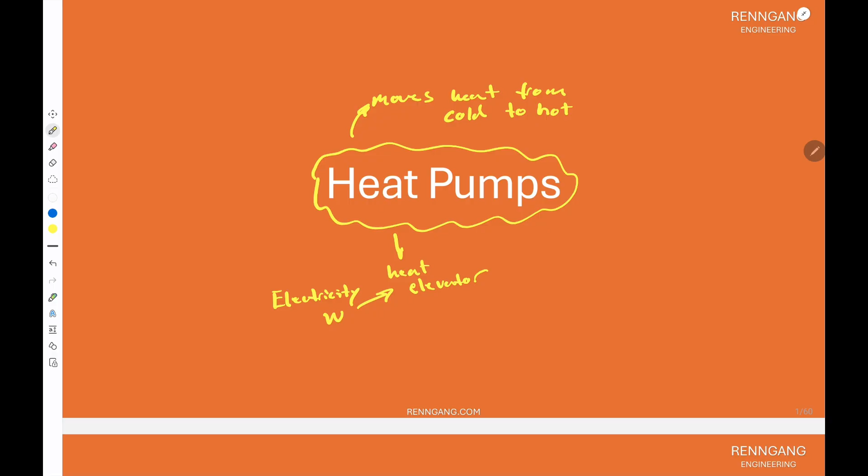So everyday examples of systems like this is that you use a heat pump to heat from cold outdoor air, or the ground, or the water, and deliver that into your house in the winters. So yes, even cold air contains heat, and that idea is crucial and often misunderstood as well.

So the reason that we are covering this is that it's an essential part of thermodynamics, and it's one of the most energy efficient heating technologies. It's used everywhere in modern engineering. On the outside of our office at Renngang, we have a heat pump heating our office space.

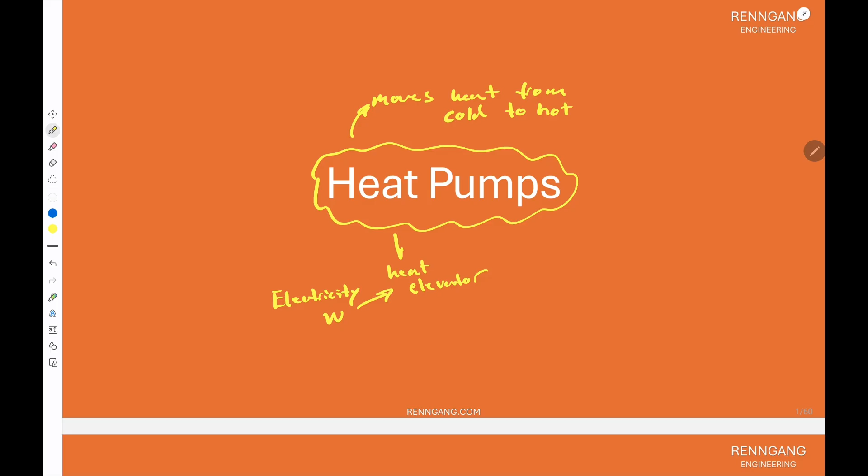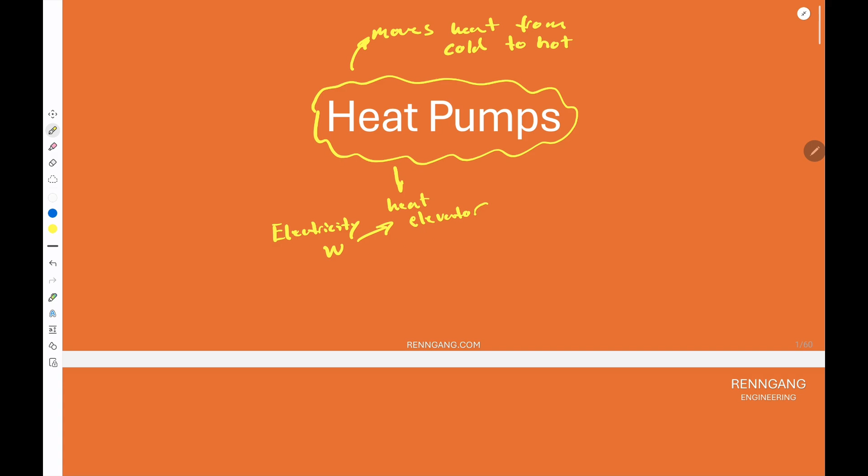Let's continue with a basic understanding of heat pumps. When we talk about heat pumps, we talk about usually a vapor compression cycle. So we are going to talk about a vapor compression cycle.

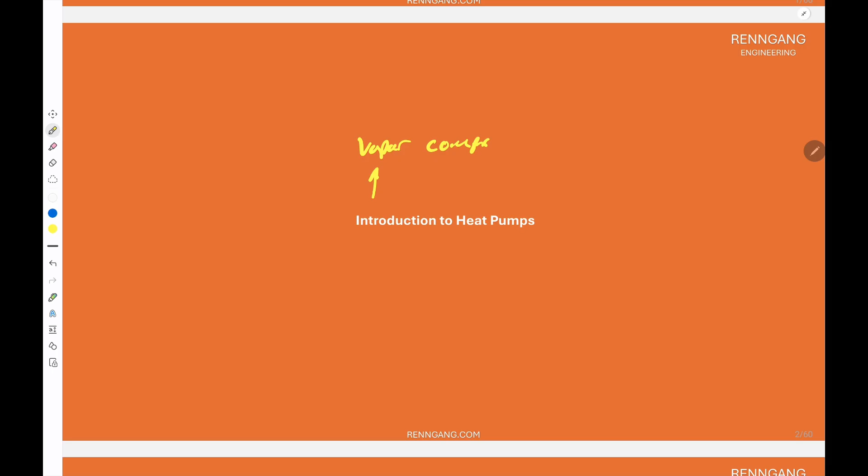This cycle represents one possible heat pump process, meaning that we're transporting heat from a low temperature to a high temperature. It's important to mention this because heat does not do this naturally, as you know. Heat always wants to flow from hot to cold. So when we move the heat the other way, we have to add work, usually in the form of electricity. So this isn't free, but it can be very efficient.

So the key point is that the vapor compression cycle lets us take heat from something cold, like outdoor air, or the ground, or the water, and deliver that heat to something warmer, such as a building or the inside of your living room.

Here's a really important thing to understand. This exact system can be used for two different purposes. If your goal is to heat the building or your house, we call it a heat pump. But if your goal is to cool something down in the summers, we call it a refrigeration system or an air conditioner. So physically, it's the same machine. The only difference is what we care about: do we care about the heat we deliver, or the heat we remove? Same process, but different purpose. It's something we'll keep coming back to throughout the module.

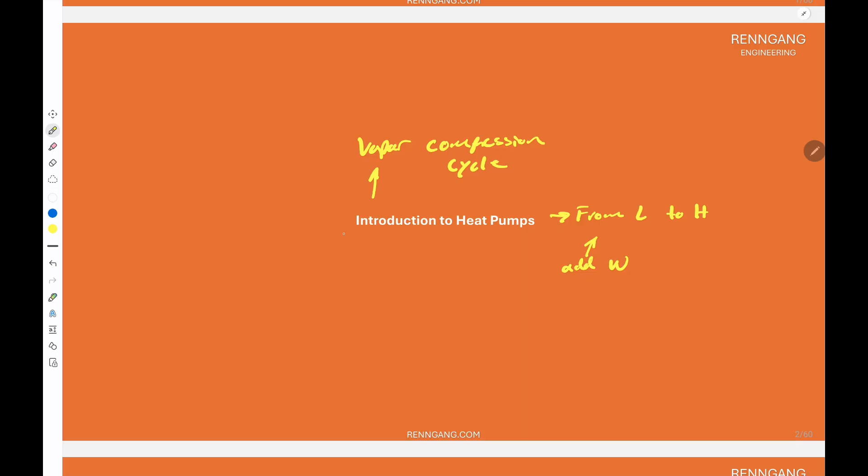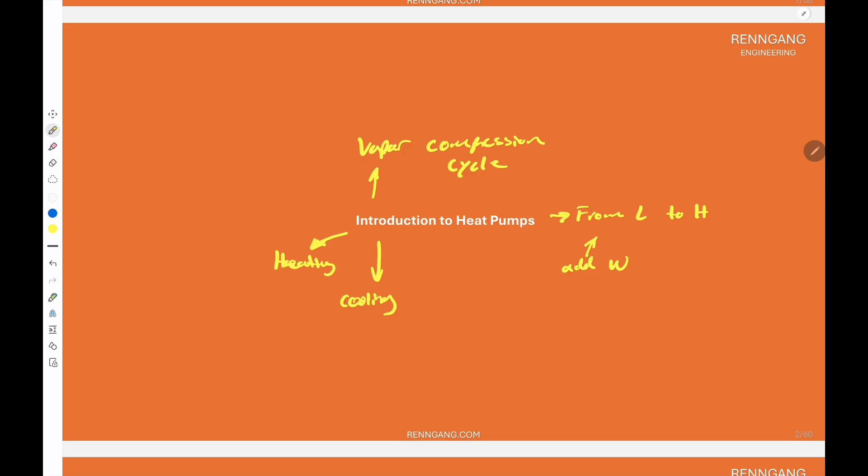Our learning goals before we dive into the details. I want you guys to be clear about what you are expected to learn in this part of the thermodynamics course. First, the goal is to build a basic understanding of how heat pumps work and when or where they are used in real life. That means you should be able to explain in simple terms what a heat pump actually does, how it moves heat, and why the same technology can be used for both heating and cooling.

Secondly, I want you guys to learn how to analyze heat pump processes. That's something you should be able to do after you're finished with the thermodynamics course. That means we'll look at the thermodynamic cycle step by step, how energy and work flow through the system, and how we describe the process using different thermodynamics concepts. So you won't just see equations and mathematics, you'll learn what they represent physically.

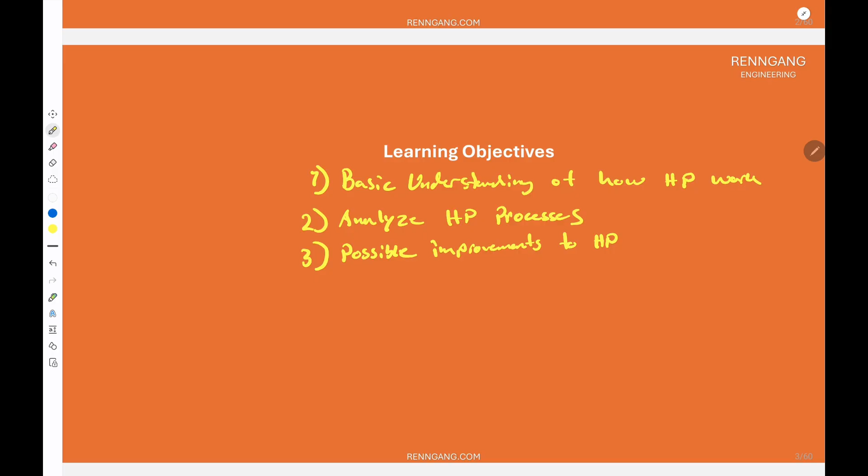The plan for us to reach those goals is that we'll start by looking at heat pumps in general. Here the focus will be the big picture. We'll show you some diagrams and stuff, and talk about what these systems do, how heating and cooling are two sides of the same idea. This is where we're going to build intuition before getting more theoretical.

Next, we're going to introduce the reversed Carnot cycle. This is an idealized theoretical cycle, so you'll never build a real machine that works exactly like this, and that's completely fine. The point of the reversed Carnot cycle is to show us the maximum possible performance and the fundamental limits imposed by thermodynamics.

After that, we'll move on to the vapor compression cycle. This is one of the most important parts of this section because this is the cycle used in real heat pumps. We'll go through that step by step and connect the theory directly to the real machines.

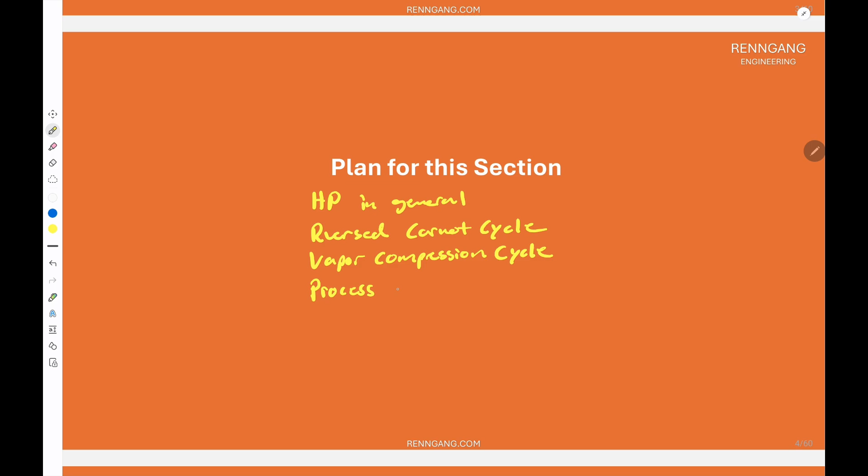And then we will look at process alternatives. So here we can ask questions like: are there other ways to move heat? What changes if we modify parts of that cycle? And why are some designs more common than others, and stuff like that.

Then finally, we'll briefly introduce alternative cooling methods — approaches that don't necessarily use the standard vapor compression cycle, but are still important to know something about. By the end of this section, you should have both a solid foundation and a broader perspective on heat pumps.

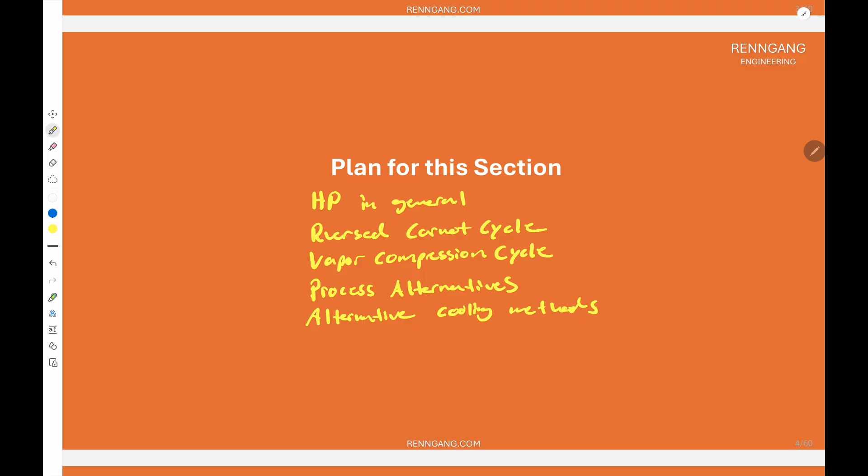Now we can look at how a heat pump is used for heating. A heat pump works by extracting heat from the surroundings or from some other available heat source, and then delivering that heat at a higher temperature than the surroundings.

Let's utilize another color here to not confuse you. So that would be in your living room, for example. Even though the environment may feel cold to us, it still contains thermal energy, and that is what the heat pump uses as a source. So cold doesn't mean no heat.

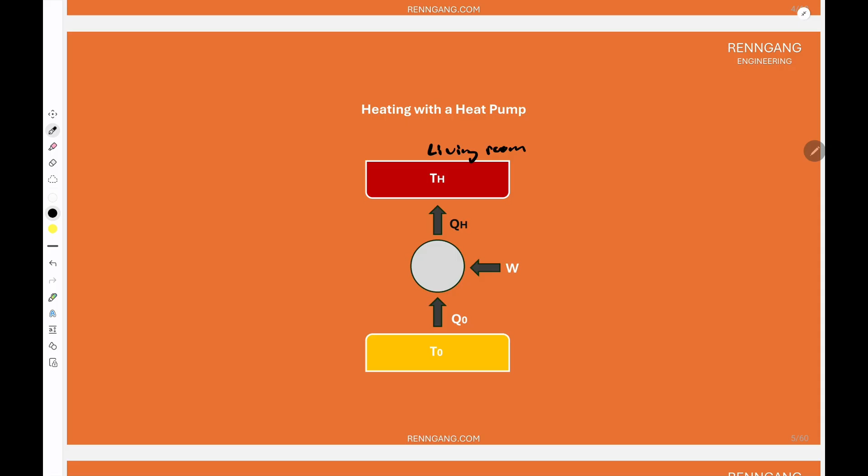If we look at the diagram here, at the bottom we have the low temperature reservoir — that's the surroundings, for example, the outdoor air, the ground, or water and stuff like that.

From this low temperature source, the heat pump absorbs heat, which we call Q0. So heat is being taken from the environment. In the middle, we have the heat pump itself.

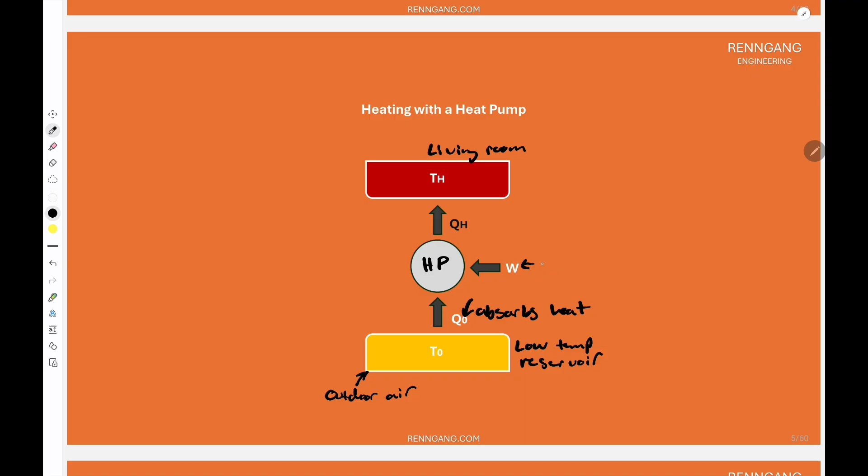To make this heat transfer possible, we must supply work to the system, which is the heat pump. This work usually comes from electricity, and it is what allows the heat pump to move heat from a lower temperature, the outside air, to a higher temperature, the inside of your living room air.

So that's where the second law comes in. At the top, we have the high temperature reservoir, or your living room or living space. Here the heat pump delivers that heat, labeled QH. It delivers heat because that's a higher temperature than the ambient temperature. This is the heat that we actually use, for example, to heat a building or your house.

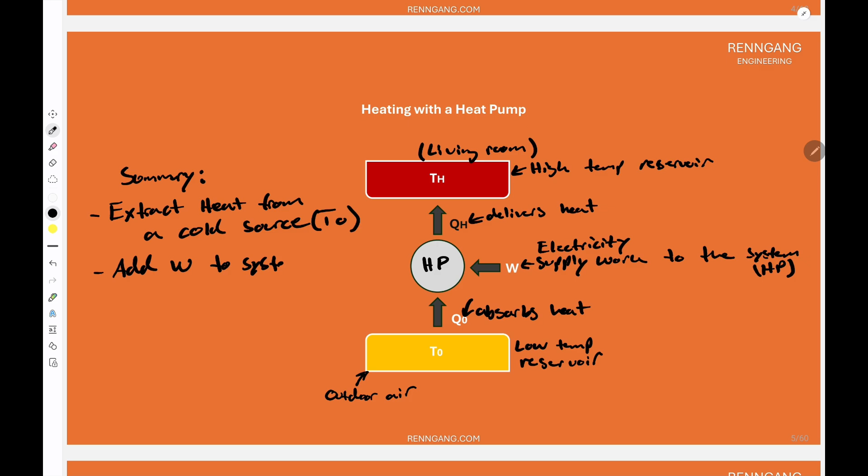So to summarize what's happening here: we extract heat from a cold source, and then we add work to the system, in the form of electricity often, and then we deliver a large amount of heat at higher temperature. That delivered heat is what we care about when we use a heat pump for heating. So this simple energy flow diagram is the foundation for everything that will follow, including efficiency, performance, and why heat pumps can be so effective.

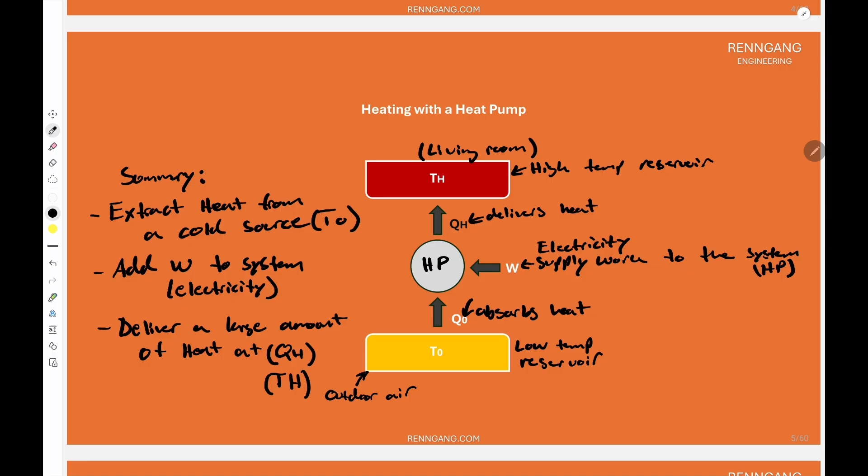So this is a heat pump used for heating. But we can also use the same heat pump, the same physical hardware, for cooling or refrigeration. In cooling mode, the system extracts heat from something colder than the surroundings and then rejects that heat to the surroundings or to another available heat sink. This is exactly what happens in a refrigerator, for example, or an air conditioning system. Again, this doesn't happen by itself — we need to supply some work.

Let's walk through the diagram here. At the bottom, we have the low temperature region, labeled TL. That could represent the space we want to cool. Let's say it's summertime now, and we want to cool the inside of our living room.

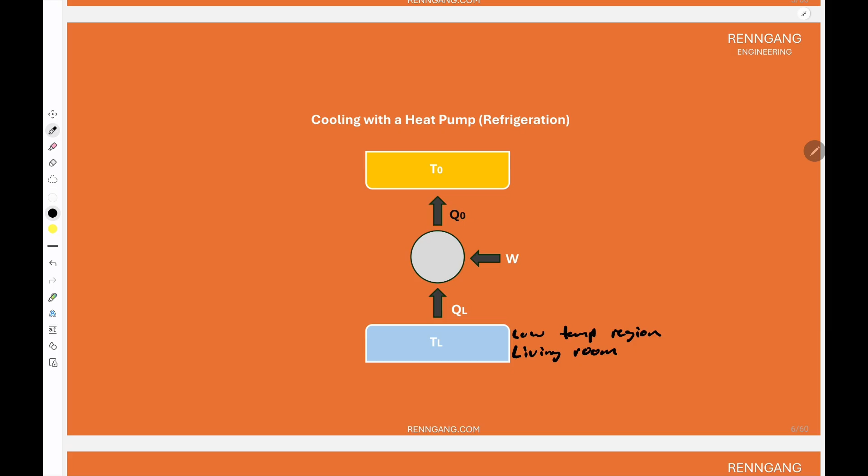From this cold region, the system removes heat, QL — removes heat. The heat removal is the whole point of the cooling. In the middle, again, we supply work.

We have to supply work. Just like before, this work usually comes from electricity and enables the heat transfer against the natural temperature direction. So at the top, we have the environment labeled, so that's outside of the house.

Labeled T0 here. So here the system rejects heat, labeled Q0, rejects heat to the surroundings. So that includes the heat we removed from the cold space, QL, plus the work input, W. So that's why the air behind a refrigerator, for example, feels warm.

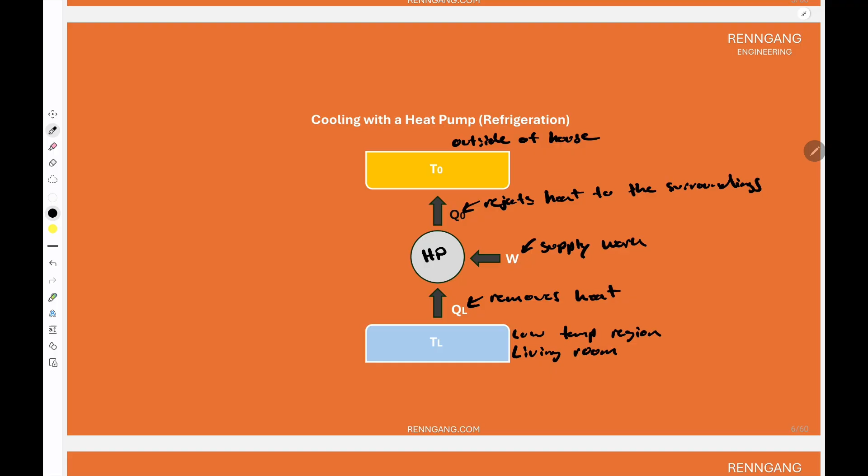So understanding this distinction between heating and cooling is crucial because it's going to determine how we define performance and what efficiency actually means in each case. Okay, I think you guys get the point. So let's move on to something that is called the reversed Carnot cycle.

The reversed Carnot cycle is a reversible process logically. So that means it represents an ideal, perfectly efficient limit, not a real machine. So this is perfect.

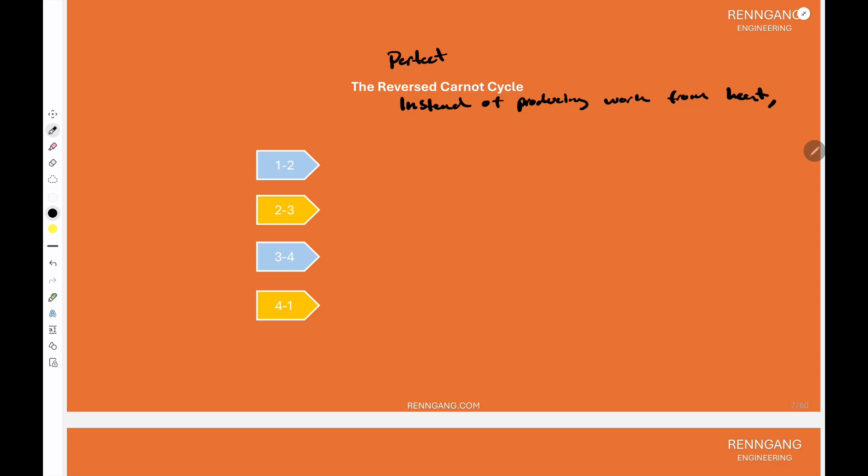You can think of the reversed Carnot cycle as the Carnot power cycle just run backwards. So instead of producing work from heat, we now use work to move heat. And we move that heat from a temperature low to a temperature high.

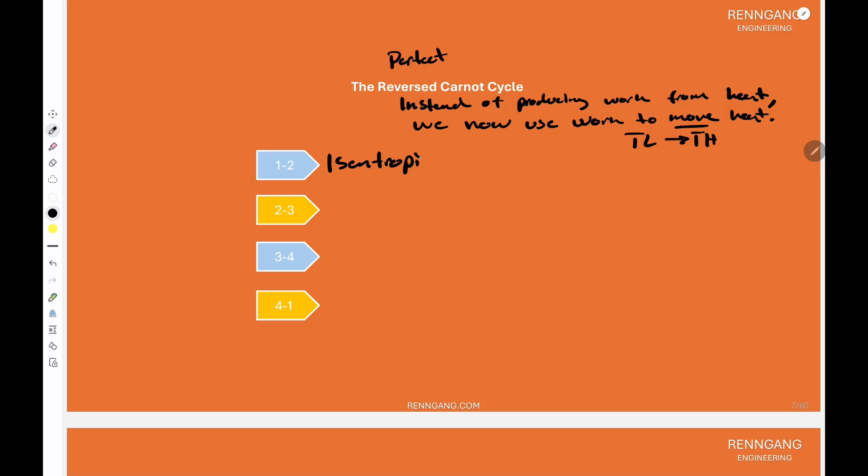If we go through the cycle step by step from process 1 to process 2, we have isentropic compression. That's from state 1 to state 2, where the working fluid undergoes isentropic compression. That means the fluid is compressed, and pressure and temperature increase. There's no change in entropy. So this is an ideal compression: no losses, no friction, no heat transfer, no change in entropy.

Then from process 2 to 3, we have isothermal compression, where temperature stays constant. So the system rejects heat to the high temperature reservoir, and this rejected heat is what we could use for heating. So the heat rejection happens at a constant high temperature.

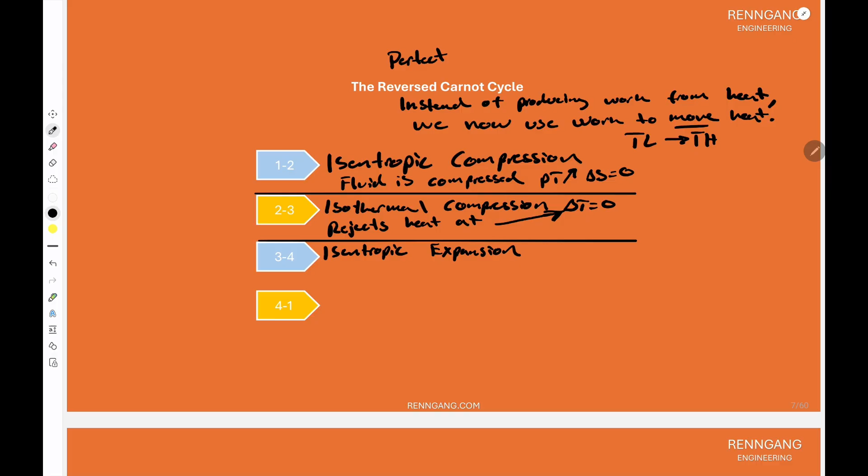Then from state 3 to state 4, we have isentropic expansion. That's when the working fluid undergoes isentropic expansion. So during this step, pressure and temperature drop. No heat is exchanged, and again entropy remains constant. So this is the ideal expansion process.

And then finally, from 4 to 1, we have isothermal expansion. In this step, the system absorbs heat from the low temperature reservoir, at a constant low temperature. So this absorbed heat is the heat that we remove from the cold source.

So the big picture takeaway here for the reversed Carnot cycle is that it consists of 2 isentropic and 2 isothermal processes, worth keeping in mind. All of these 4 are fully reversible, so that's why the cycle gives the maximum possible performance, but it's impossible to build. So this defines the upper limit, in a way, for heat pumps and refrigeration performance. It gives us a kind of benchmark to compare real systems against, since real cycles in real life will always perform worse and never better than this.

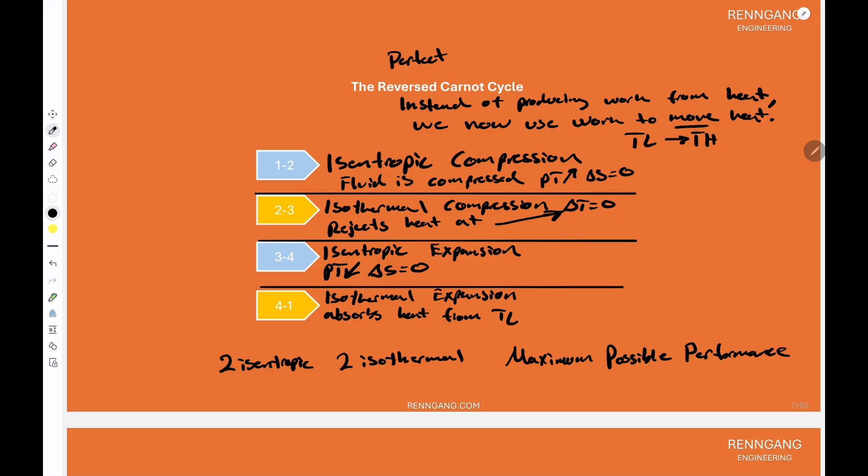So if we look at the reverse Carnot cycle in a temperature-entropy diagram together, this diagram shows the temperature and the entropy here. So this diagram is very useful because here we can visually see the areas that represent energy. So what we see here is not geometry, it's physics.

So if we go through the cycle step by step, following the arrows here, you see that it's reversed, counterclockwise - the arrows pointing this way. So from process 1 to 2, the process is upwards here. That's isentropic compression, meaning entropy stays constant, so the line goes straight upward. During this step, work is supplied to the system, and pressure and temperature increase.

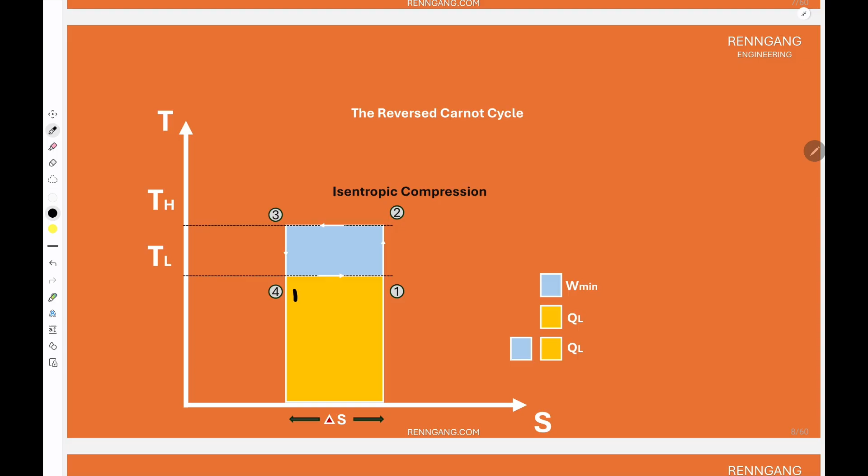Now let's interpret the areas in the diagram. The orange area represents QL, which is the heat absorbed from the low temperature reservoir.

The blue area represents the minimum work input that is required to drive the cycle.

So altogether, the blue area plus the orange area gives the total heat delivered at the high temperature. So this equals the total heat delivered. Visually, this equals QH equals QL plus the work input.

The key takeaway from this reverse Carnot cycle visually explained is that this is the absolute best performance a heat pump, air conditioner, or refrigerator can ever achieve. It requires the minimum possible work, it's fully reversible, and it sets an upper limit for the real systems that we make in real life.

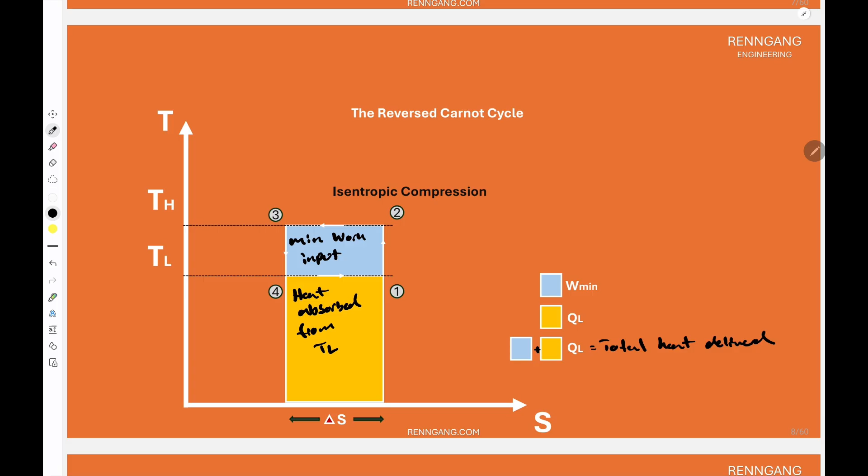The last thing I'm going to talk about in this video is the maximum performance factor, or the coefficient of performance, COP. When I look on the back side of a heat pump mounted on a building wall, for example, you will see a COP.

We are still looking at a reversible process, meaning the reverse Carnot cycle. That's important to remember because everything we derive here represents the ideal upper limit, not something real machines can beat. So if we just start with the energy balance,

heat delivered at a high temperature, QH, equals QL plus work. So that consists of the heat taken from the low temperature source, QL, plus the work supplied to the system, W. This is not a new idea, it's just conservation of energy.

Then we can also rearrange stuff here. So the work input is equal to QH minus QL. That's just a rearranged energy balance.

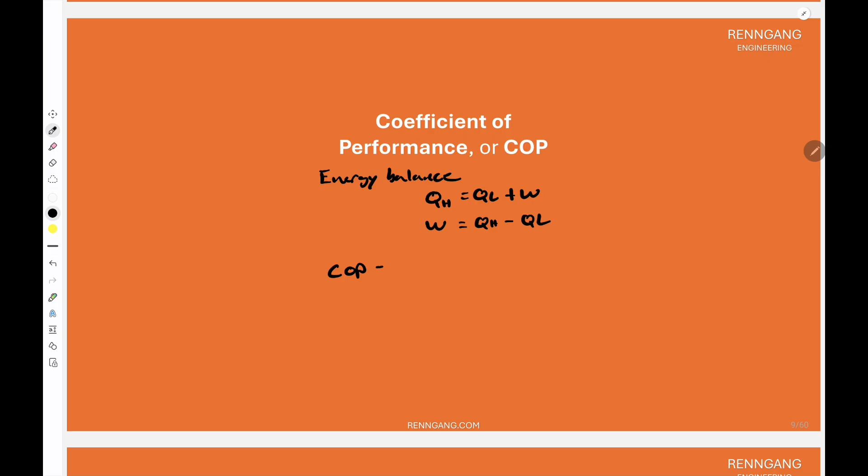Then we can define the coefficient of performance, or COP, for the heat pump used for heating. For heating, we care about how much useful heat we deliver compared to how much work we need to supply. So the COP for a heat pump is defined as COP equals QH divided by QH minus QL.

That's QH divided by the net work input. Now comes the key idea here: for a reversible heat pump, the work input is minimal, so that means the COP reaches the maximum possible value.

So the COP maximum is equal to QH divided by the minimum required work. We can write that as QH like this. For the reversed cycle, this maximum COP can be written purely in terms of temperatures as well.

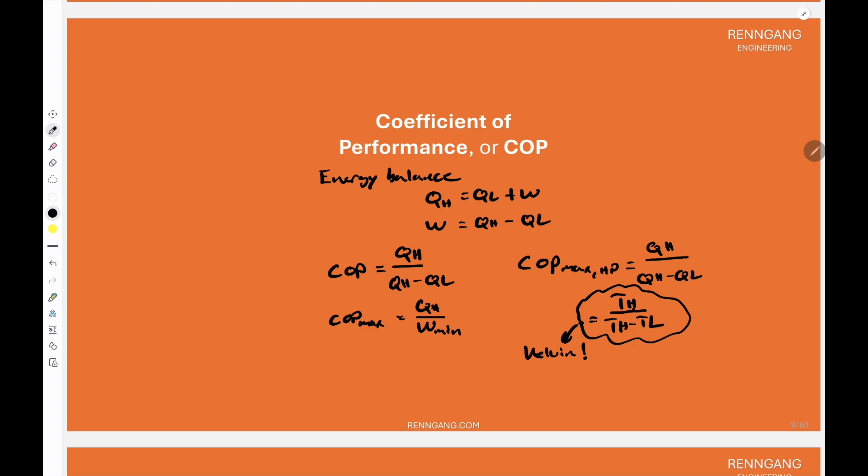If the temperature difference TH minus TL is small, let's use another color here, if the difference in temperature is very small, then you see what happens: the COP becomes very large. But if the temperature difference is large, the COP becomes smaller.

So heat pumps work best when they don't have to lift heat very far in temperature. That explains why low temperature heating systems, good insulation, and mild climate conditions all lead to very efficient heat pump operations.

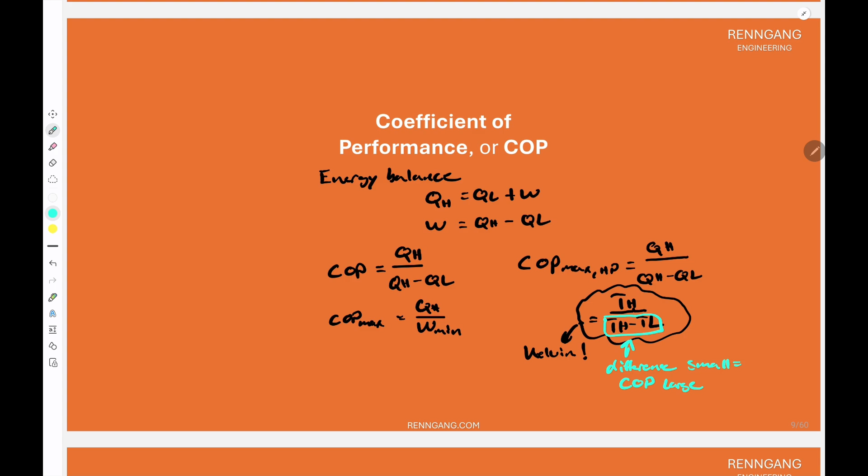Let's make a one-liner, connected to what we saw here: heat pumps work best when not having to lift heat far in temperatures. So that's the connection here.

The reverse Carnot cycle gives us the maximum possible COP, the minimum possible work input, and a clear benchmark for real heat pumps. Real systems will always have a lower COP than what we calculate by utilizing the Carnot cycle or reverse Carnot cycle. That result will be a reference point when we later analyze real vapor compression heat pumps.